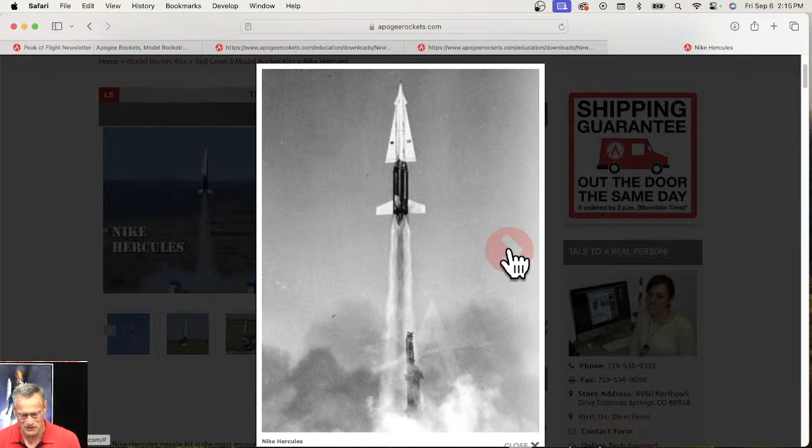And here's a picture of the real Nike Hercules. From what I hear, the real one reaches Mach 1 about when this photo was taken. It's already going so fast because it's got so much thrust coming out of it. And then here's some standard pictures that you see on the internet. So that's the Nike Hercules. I won't talk about it anymore because we're here to talk about RockSim.

Tara Wheelock is asking about what kind of glider we are going to be building. We're going to build the Mini Condor. So if you type in Mini Condor, this is the rocket we're going to build. It's a small rocket. It's powered by mini motors from Estes. Come on, open up. That's what it looks like. It's got

My mouse froze. My screen froze. There it goes. It came back.

Yeah, so it's got a glider pod on the top. And this is a beautiful flying glider, and it's an easy one to build, and so that's why we chose it. It's got a resin piece here. Everything's laser cut.

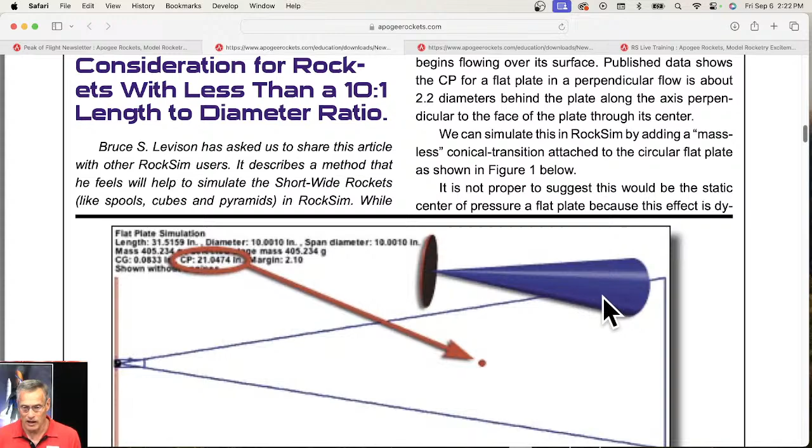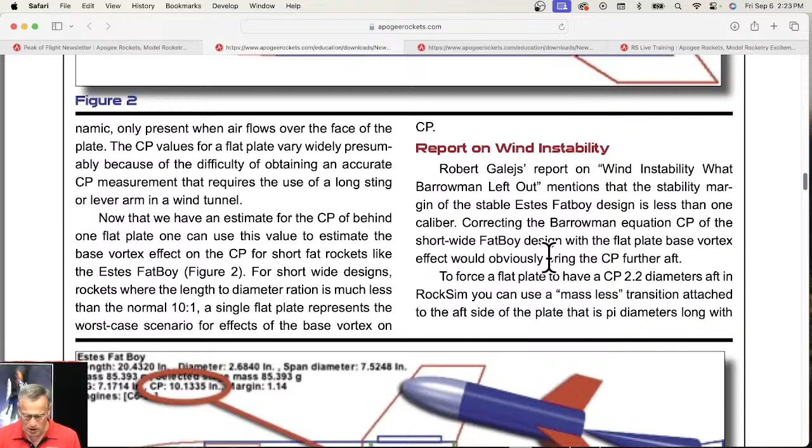So what he found he could do was simulate a spool rocket with a disc with a cone hanging off the back end. His formula was to make the cone pi, 3.14, times the diameter of the rocket. So that's the length of the cone, and the diameter of the back end of the cone is the same diameter as the rocket. You attach that to the rocket, and that's going to move your center of pressure back. It works for spool rockets, and he thinks it works well for short, stubby rockets.

At what point do you stop putting the cone on the back? I don't know. I wish I did. If we had wind tunnels or computational fluid dynamics, we could maybe do some experiments, but we don't. So you could build some rockets, and the problem is the motor for this is in the normal spot, so it's going to burn that cone off.

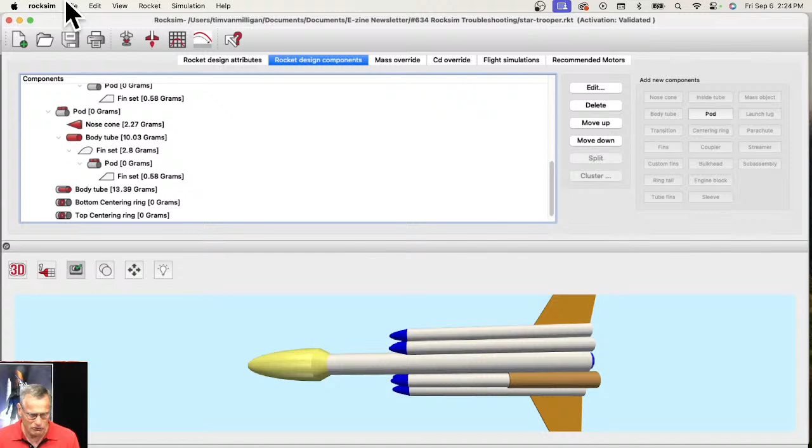So let me open up RockSim here, and let me open up the Fat Boy. Oh, he sent me a rocket. Did I save it? Shoot, I don't think I saved it. So I'll open up. It was the Doorknob. So let me see if I can find the Doorknob.

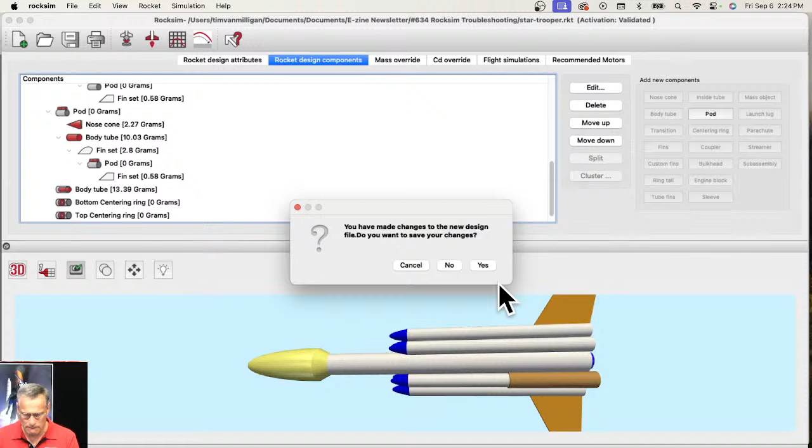Doorknob. Doorknob, I'm looking for it. Yeah, there we go. So we have an Estes Doorknob. Okay, so here is the Estes Doorknob. It's a relatively short rocket, so it's got a diameter of 3, a length of 27. So 27 divided by 3 is 9. So it's got a length to diameter ratio of 9. So this does violate the Barrowman equations.

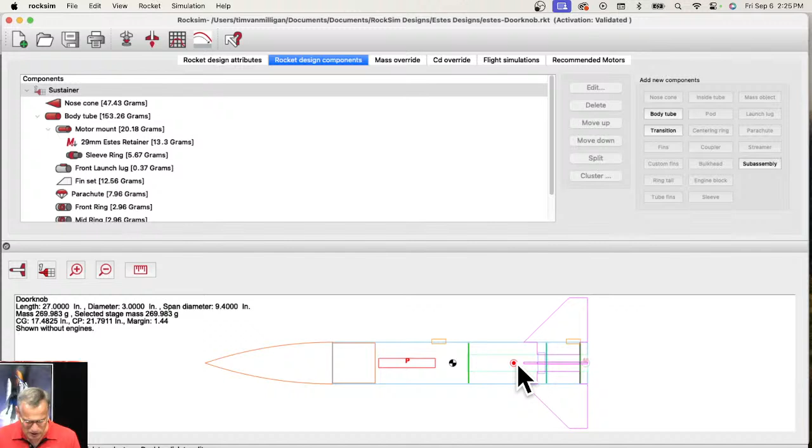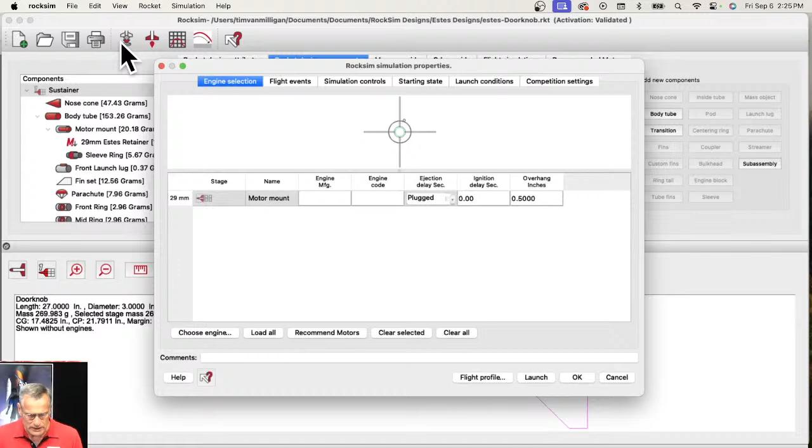So right now our center of pressure is at 21 inches, which you can see right here, from the tip of the nose cone. So that's this little symbol right there. And let's put a motor in this rocket so we can see what's going on when we put a motor. And this is a motor mount of 29 millimeters. And I don't want to show all engines, I want to show only those that match the motor diameter.

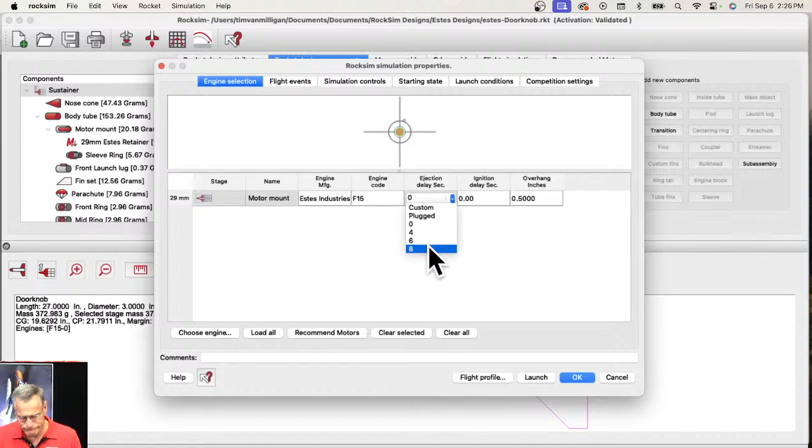Let's try an Estes F15. And let's give it a delay of 8, I don't know, and say OK. Okay, so now by putting the motor in there, what happened was the center of gravity, which used to be up here, shifted back because now the back end's heavier. So our margin is 0.72.

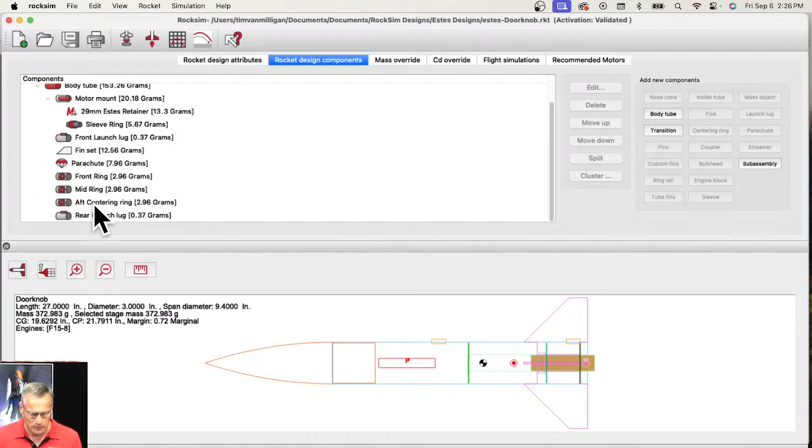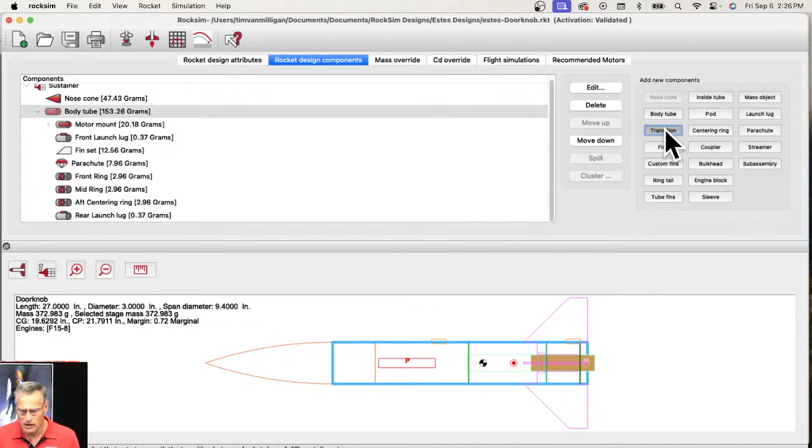All right, so now how do we add that cone on the back? So I'm going to close all these. Okay, so I'm going to add the cone to this body tube right here. And if I go over here, there's nothing that says cone, but we do have one that says transition, and that's what we're going to use. So I'm going to click on that, and it's going to open up the database, and we're not going to go from the database, so I'm going to cancel out of the database. And this is the editor screen for the cone. And right now I'm looking at the rear view of the rocket.

So if you come over here to the side, and we'll select the side view, and so now we can see it. And our cone is not showing because everything is 0 right now. So the front diameter, we want to make it as pointy as possible. So I'm going to make it tiny, so 0.01 inches. And then my rear diameter, remember the rear diameter is the same diameter as the body of the rocket. So that's going to be 3 inches.

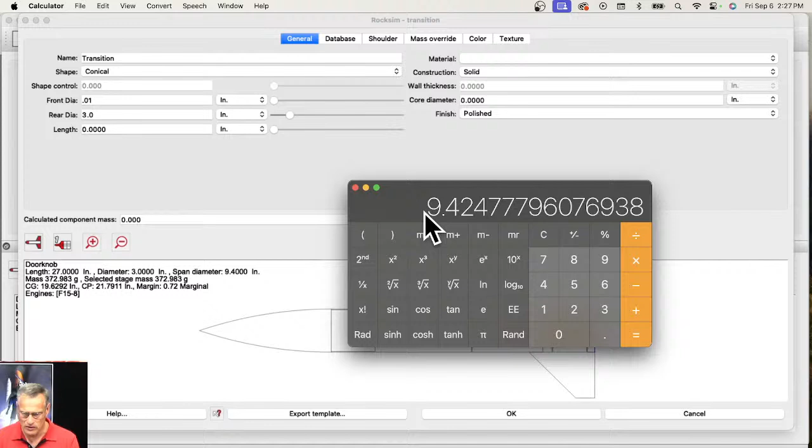And then the length is pi times the diameter of the rocket. So let me get a calculator here. So we got a diameter of 3 inches. So pi times 3 inches is 9.42 inches long. Okay, so our length is 9.42 inches long. So now we have a cone on the back.

One of the other things that Bruce said in his article was it has to be massless. It can't have any mass. And the reason is that's going to shift the center of gravity back on us. So we need to make this like paper thin. So I'm going to make it paper thin, and it's going to be hollow. And you can see right now our mass is 0 grams for that component. And if I look at it in 3D, you can see my cone sticking out the back of the rocket.

So now the purpose of this was to change the center of pressure. And before, our center of pressure was at 21 inches, so it was a little bit further forward. By putting this cone on the back, it shifted it back, and now our margin is 1.18. Before it was 0.7 something. So that's what it did to move the margin back. It didn't add any mass to the rocket, so theoretically it should still fly as high as it did before.

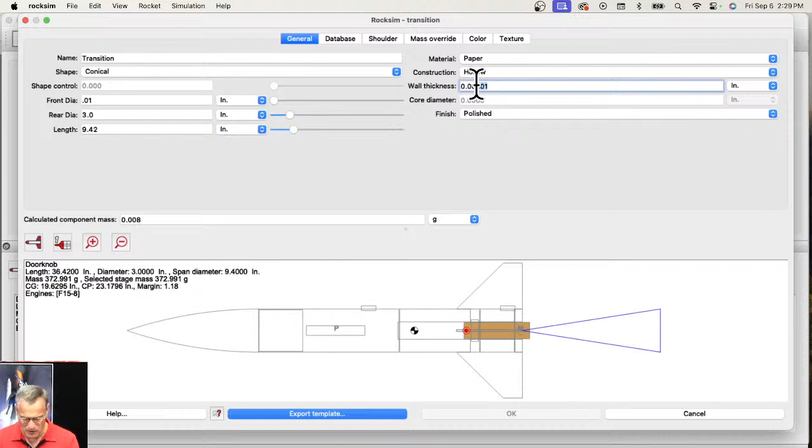We'll say okay here. And the thickness must be greater than 0. Okay, so we got to add some thickness here. So I'm going to make it 0, that much. And oh, what happened? My button is not working. Oops. It's asking me to save it. I don't want to save it. Is there something else open behind me?

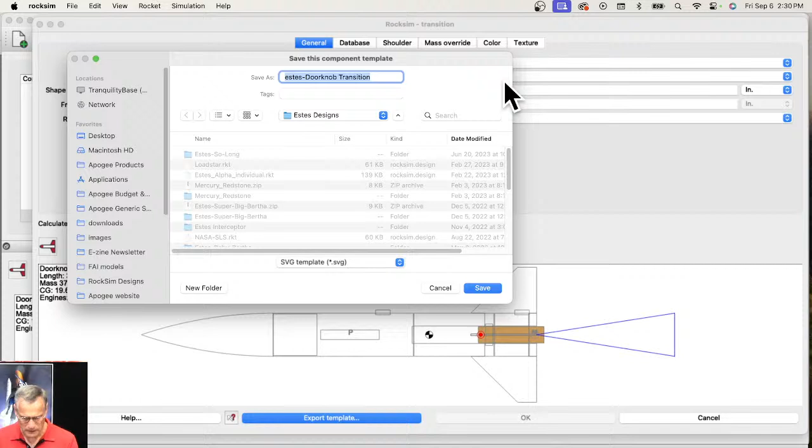Export template. This has happened to me before. It's asking me to save this component. It's kind of like it's looking in the database. My button stopped working. What's going on? Let's click here. Oh, save your changes? Yes. Okay, well, I got around that. So my cone is on here.

We can run a simulation. Okay, we already got the Estes F15-8 in there. We're going to deploy the parachute at maximum ejection, launch conditions. We're launching from an altitude of 700 feet, and we have a 5-mile-an-hour wind. And let's see the flight profile.

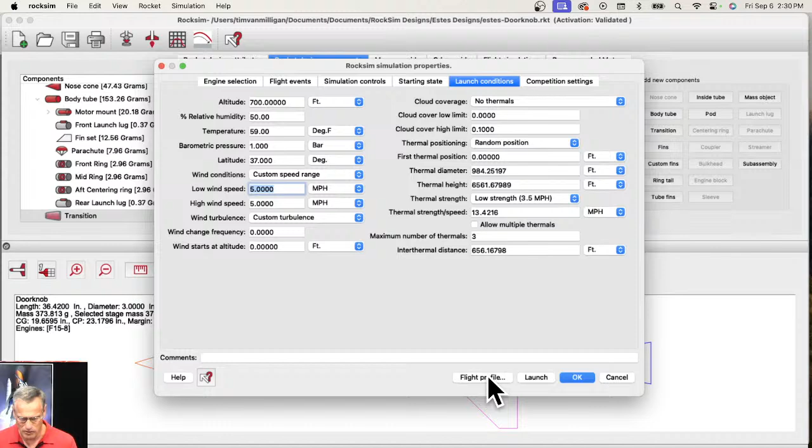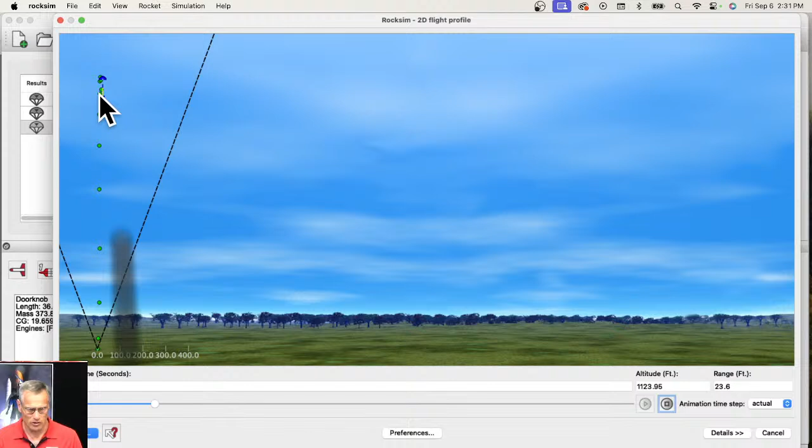Because this is a little bit more stable, we'll see what it looks like. And it's taking off. It's going really straight, actually. So that's pretty good, I'm okay with that. And there's the parachute, right on cue.

I don't know if this will answer your question about cones, because there's a lot of questions I have. Do I use them on my own rockets? I don't. But Bruce liked them, and he swore they worked. It lets you design rockets on that hairy edge of stability, and if they're under that 10-to-1 ratio, they might be stable because of the extra drag. RockSim doesn't calculate that extra drag, and if we knew that base drag better, maybe we could, but I don't know.

So it's going to take some experimenting from the modeler if you want to use this technique. I wish I could endorse it fully, but if you don't have that cone on there to make it stable, this rocket had a margin of stability of 0.7 prior to adding the cone. I would still be okay flying it with that margin of stability. But if you're not okay with it, you have to put nose weight up front to move the center of gravity forward, so that the margin, which is the distance these are apart divided by the diameter, is as close to or greater than 1 as possible. So let me know, Mark, if that answered your question.

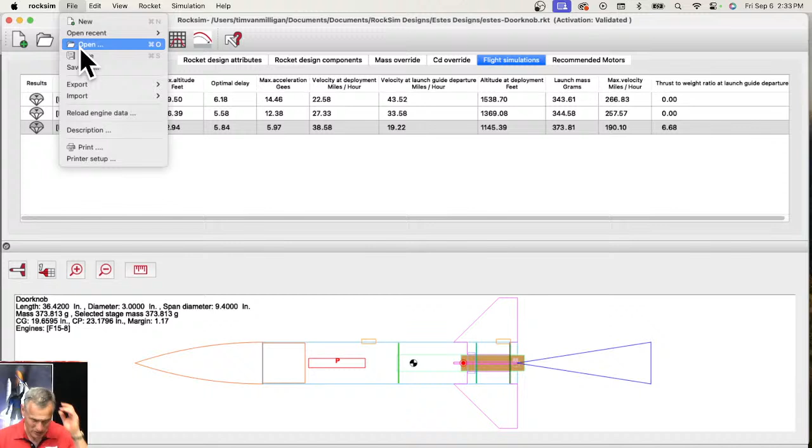Okay, so we need a rocket with a subassembly. I was just looking at one the other day. The Semroc Mars Snooper. You can see what it looks like, and I can tell it's got pods on it because the only way to put that there is to have a pod on it. So you go to the rocket design components.

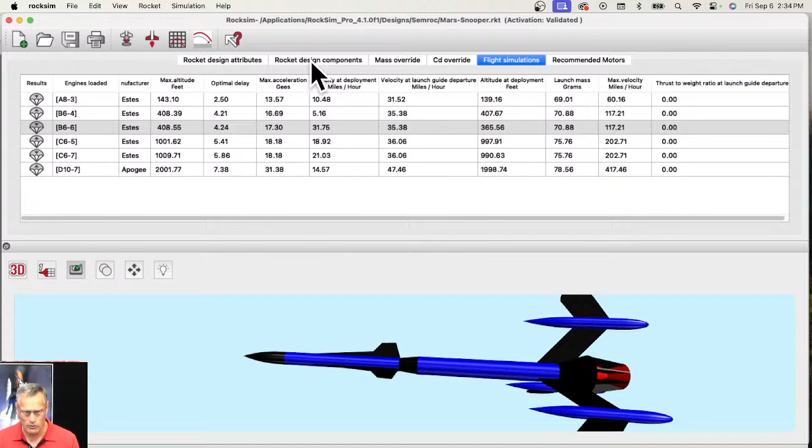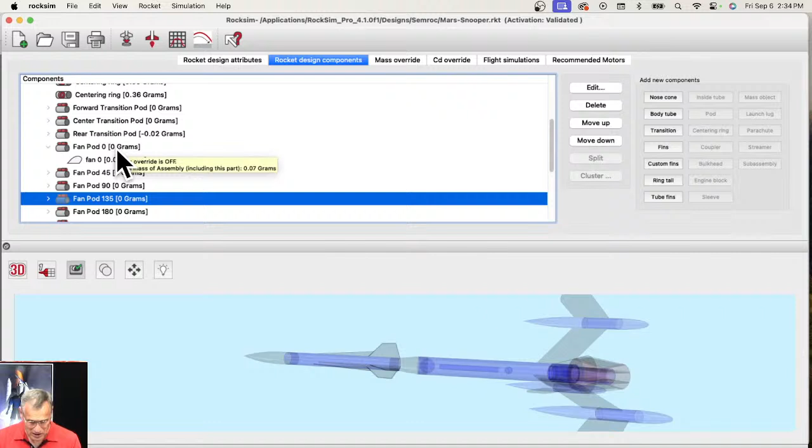And if we go down to the pods, I swore it added. So you can see right here, it's not telling me the weight of that pod, and I swore that it did. Maybe it's because this rocket is brand new, or it was made old.

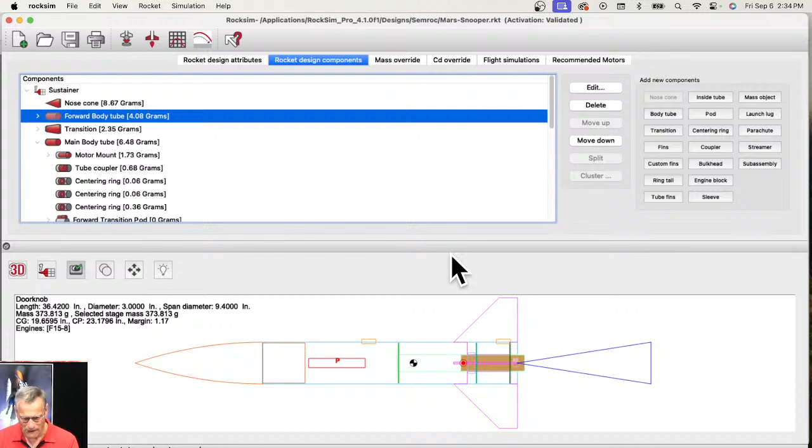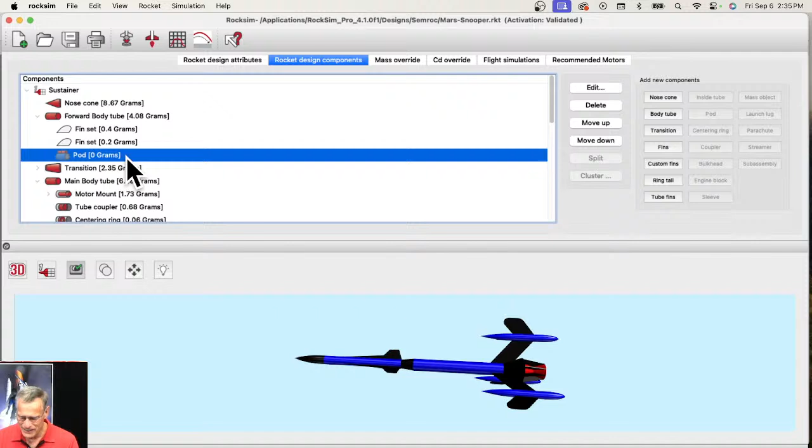Let's try it. Let's go to this forward tube and add a pod. We'll just throw one on there real quick and see what happens. Holy cow, okay, so that's where the location of the pod is. And we'll say okay. Now it's running a little slow, I got a lot. When I'm running my Mac it runs slow, I need a new Mac. So let's add a nose cone to that pod.

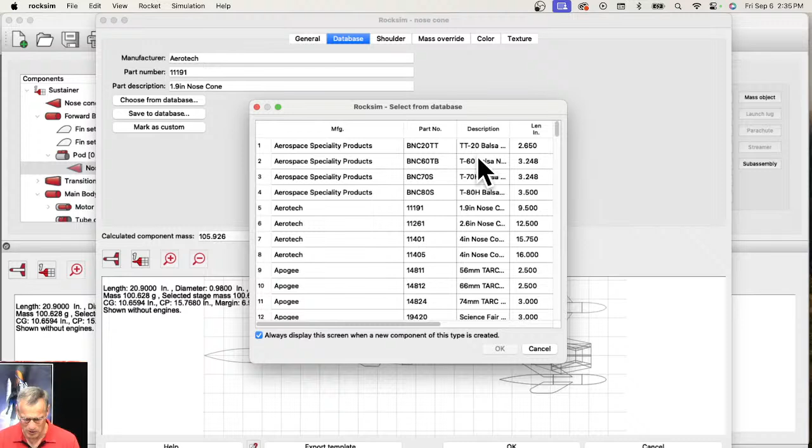It doesn't matter what nose cone I use, just add one. Oh, that's a big nose cone. Let's go choose the database again, let's make something a little bit smaller. PNC 24 - okay, well, yeah, it's still pretty big, but I'll add that. So that is added to the pod.

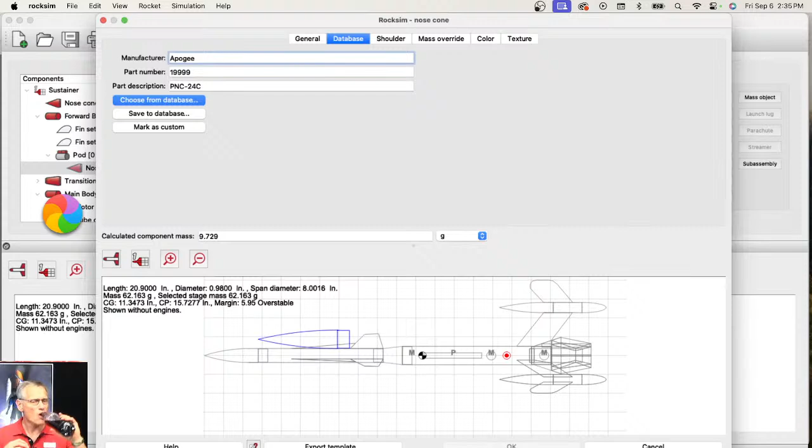If I come back to this screen here, let's see what happens. It still didn't add, it still didn't add the weight. So I guess that answers my question - it doesn't add. It should, I thought it did.

Maybe there's a preference I'm missing. I'm looking at my preferences here - show masses in the component tree. Let's turn that off, and it shouldn't be showing the masses right now. Okay, so now it took away the mass. I'm going to turn that back on. Preferences, under units, show the masses in component tree. Now this is only in version 11, so it's not in older versions - this is a new feature.

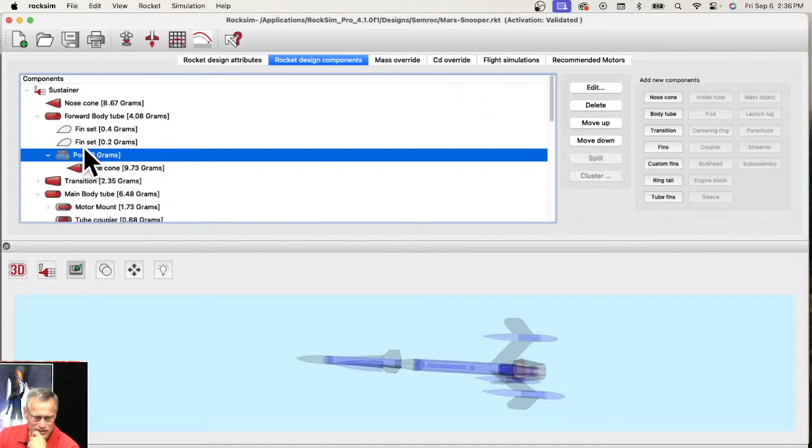So turn it back on, it's thinking. Still not showing - I swear it showed before. I'll have to talk to the programmer about it, but we have our answer.

But what you can do is - let's see if I can find another pod. So here's a pod right here, but it only has one part. But if the pod has multiple parts, all the component masses are going to be listed right below it, so you can just take out your calculator and add them up really quick. So that should work.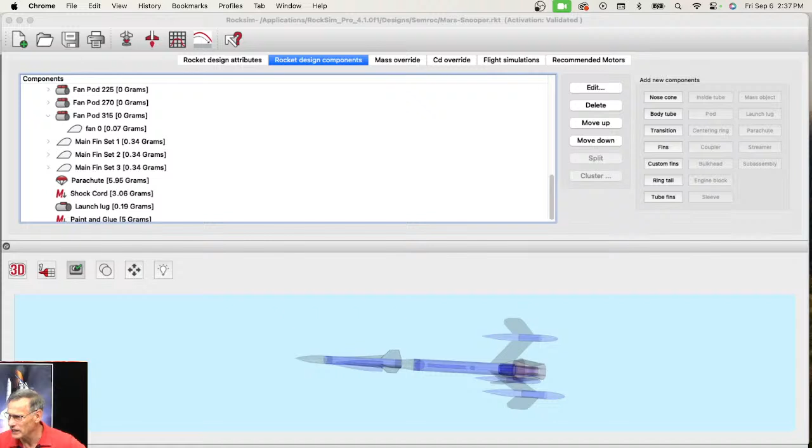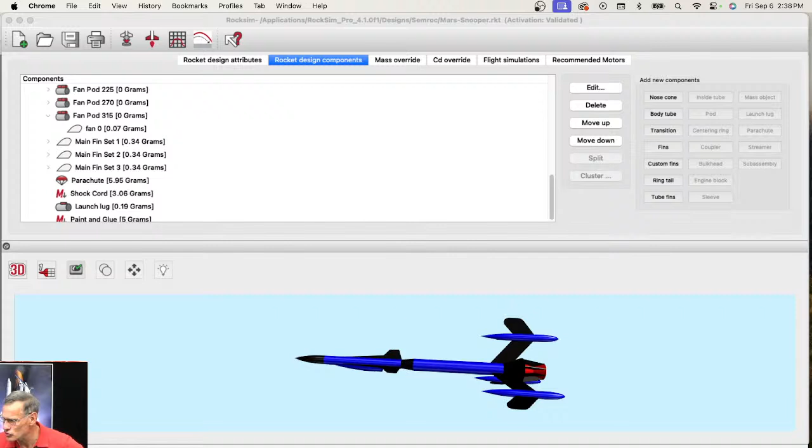Okay, so David Hayes asks another question: also, not sure RockSim 10 is updating the engine info properly - dates on engine files in the data folder do not change. Also, many of the engines come through with a question mark for the diameter when I try to load them in a sim. Okay, so RockSim 10 doesn't auto-update the motors like RockSim 11. But he's saying: I have dates on engine files, the data folder do not change. Also, many of the engines come through with a question mark for the diameter when I load them in a sim.

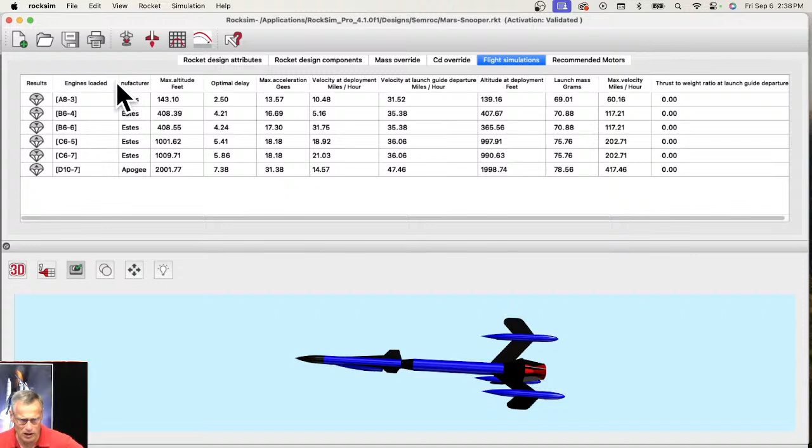Sometimes if you go to the flight simulations tab and add a new column called engine diameter, right now it's not showing. So if you right click on the column header and choose organize columns, you can select engine diameter, then click OK, and it adds the new column.

And right here you'll see there's a question mark. I think this is what he's talking about. Let me take that column and move it over here so we can see it. Okay, so here's the engine diameter. So a D10-7 from Apogee, it says I don't know what diameter it is.

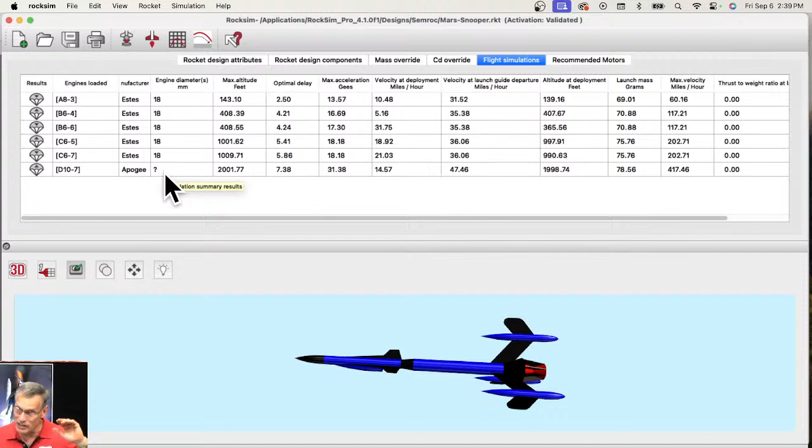The reason is, in this simulation summary screen, which is what you're seeing right here, these are old simulations. So this is telling me these were probably run prior to version 11, so in version 9 or 10, and then the file has been opened in version 11. Version 11 saves the diameter, version 10 and 9 did not, so the simulation summary screen won't show it. But if I run a new simulation, it should pick up the diameter.

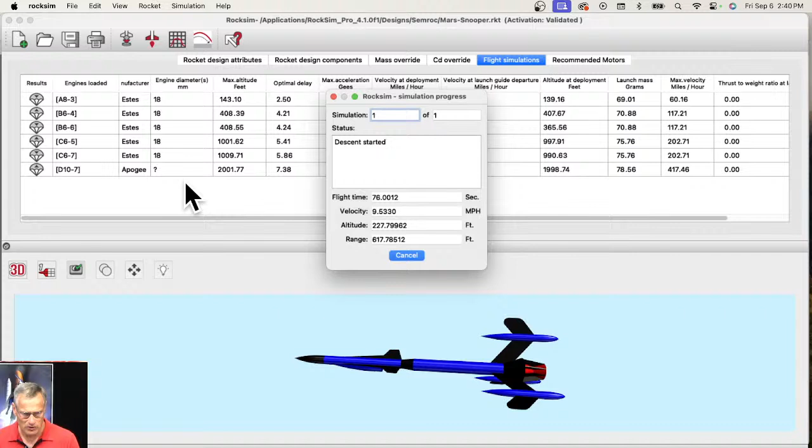So if I use a Quest C18W-8, click OK, and launch it, and it runs the simulation, I'm expecting to see a diameter right here, because now under new flights, it's loading the diameter.

But if you're seeing them in the engine database, choose engine, you should see them here. If you're seeing a question mark here in this screen under engine selections, I've never seen that before, so I couldn't tell you why you're seeing that.

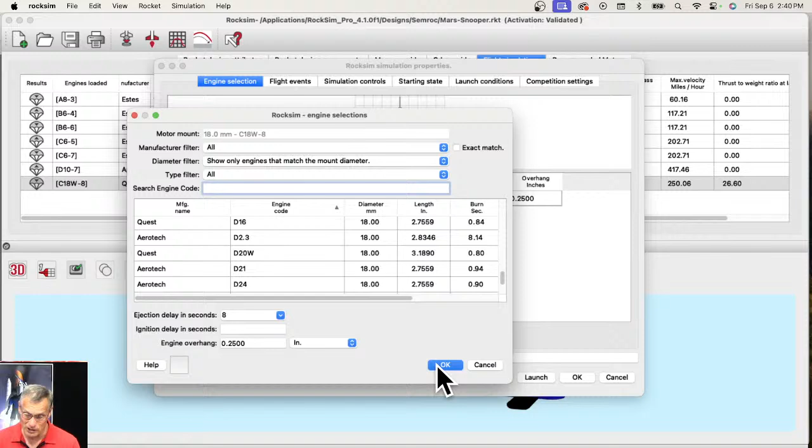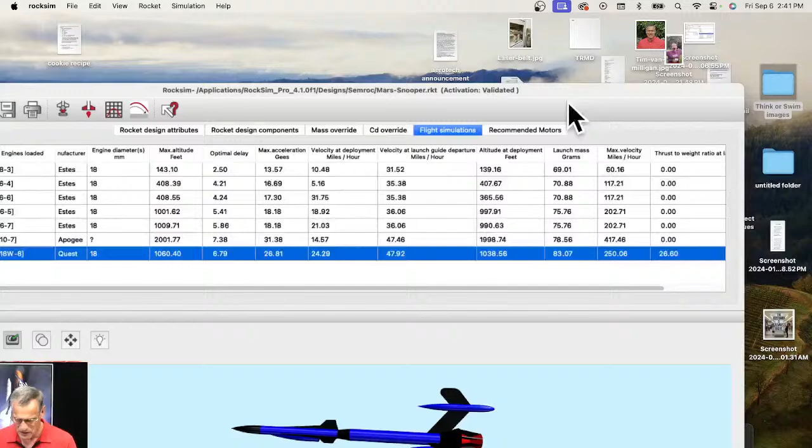As far as engine dates and the engine files, those original files are stored - let's quit that. If you go to your Finder and go to the Go menu and hit the Option key, I can load my library because they're kind of stored in a weird place.

So it's under application support. Why is this not in alphabetical order? Let's change it to this way. And then under Apogee components, I'm running version 11, and then they're under the data folder. So now I'm in the data folder, I hope. Okay, yeah, I opened up the data folder.

Here are the dates, I'm not sure if these are the dates they were added to the RockSim database. All of these show 2024, so I'm thinking that's the date they were added to the RockSim database into this folder, downloaded from thrustcurve.org. But I don't know what the question is - it says they're not in the file, but they are in ThrustCurve and available on Aerotech's website.

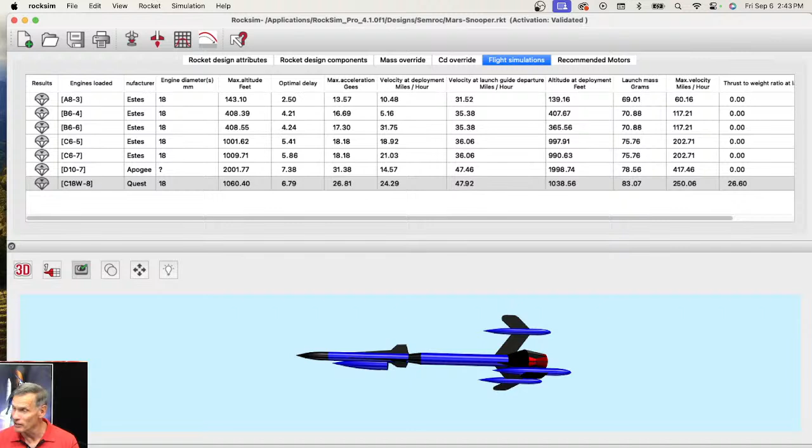I mean, OpenRocket - oops, where'd it go - this one right here, I am pretty sure that OpenRocket can't make a rocket that looks like this. RockSim can do some spectacular things, and I'm still learning, and I've been developing the program.

TURDA4U says, I'll take one when available. I think he's talking about the Nike Hercules.

Starco 3 asks if my picture is frozen, and maybe it froze on my computer for a second there, so hopefully it's not freezing for you too much longer.

Alan White is here, and he says hi Tim. Alan White from Seabrook, Texas, checking in. It was a pleasure to finally meet you at Airfest last weekend. Looking forward to that new Nike Hercules. Thank you.

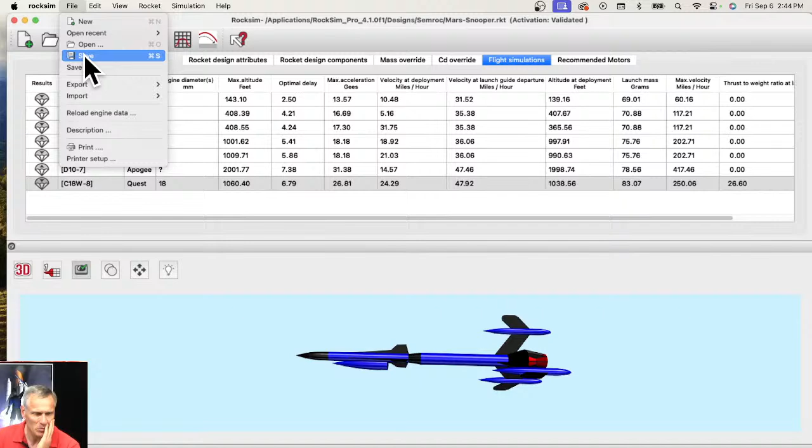Mark Sell says, do you have a RockSim file for a spool rocket? And I don't know - oops, I don't want to save, I hit the wrong button. File open, go to my search bar and type in spool, see if anything comes up. That looks like a RKT file, there's a picture of one. I do not have a spool rocket file, sorry, I don't.

David Hayes says, try simulating the doorknob without the cone. Well, I already lost it.

Low Budget Bob says hi from Buckeye, Arizona.

Terry Wheelock says, do you need a cone for a cone rocket? And the answer is maybe, I don't know.

Ron's Rocket says, add a pod to the Nike Hercules. Why would I want to add a pod to the Nike Hercules? Okay, I got an example.

Nike Hercules. Okay, Nike Hercules rocket. I should have a new one, because Martin made me one. Let's try this one. Did my changes? No.

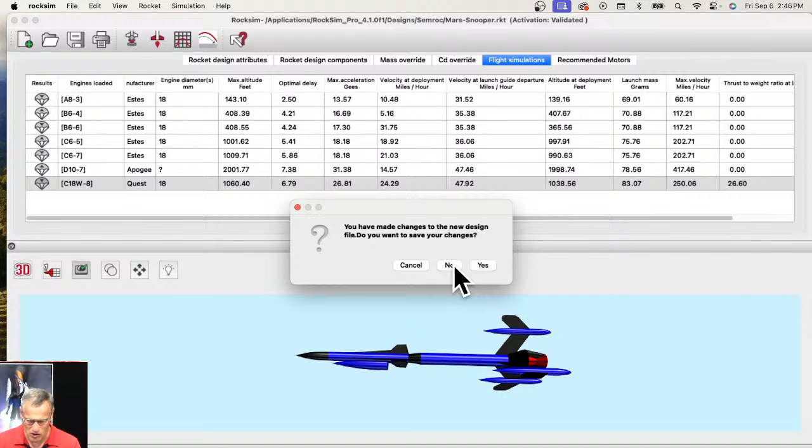So one of the reasons you might want to add a spool or a pod is maybe you want to put a camera on the outside of the rocket. So that would be a use for a pod on the Nike Hercules. See this transition here in the middle?

RockSim doesn't like shapes like that. It needs things to be circular like this. So we had to cheat on the back end of the rocket right here to make a Nike Hercules so that we could actually fly one.

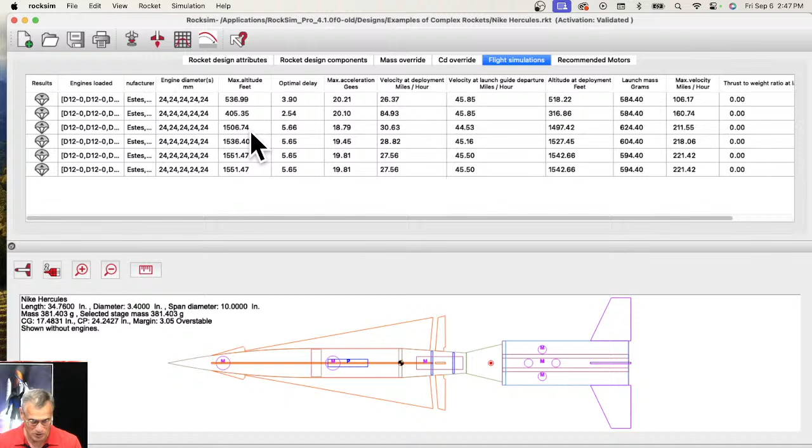But to add a camera, you find a body tube. So I can say I'm going to put my camera on this tube. And then you'll select a pod. Right now I put the pod right there.

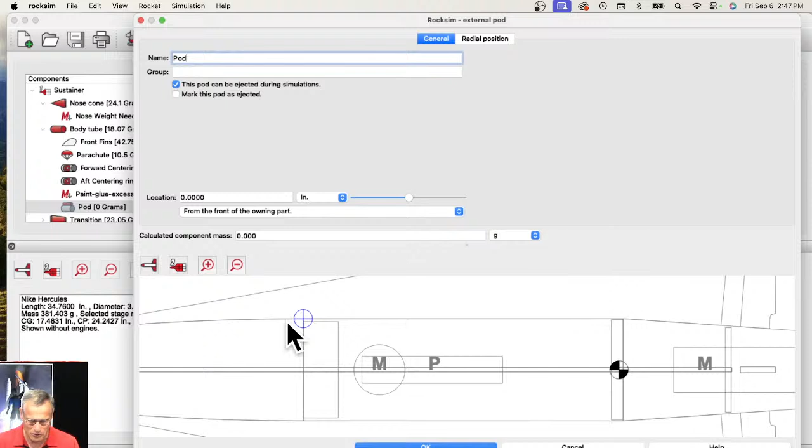The pod is a collection of parts, so it doesn't look like anything right now except for just this symbol. So we're going to call it a camera pod. Click OK, and then we can start adding parts.

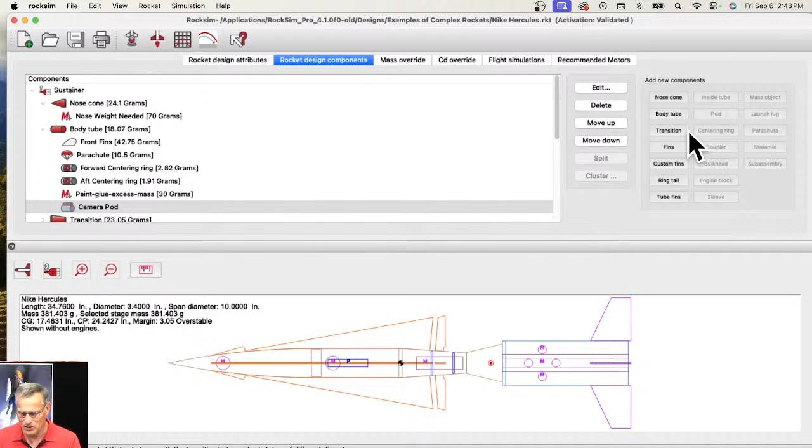So what does a camera look like? Well, again, we don't have too many parts we can use. We can use a nose cone, a body tube, or a transition. I'm going to try a transition just to say what the heck. It always looks in the database when you're starting a new part, so I'm going to cancel out of that.

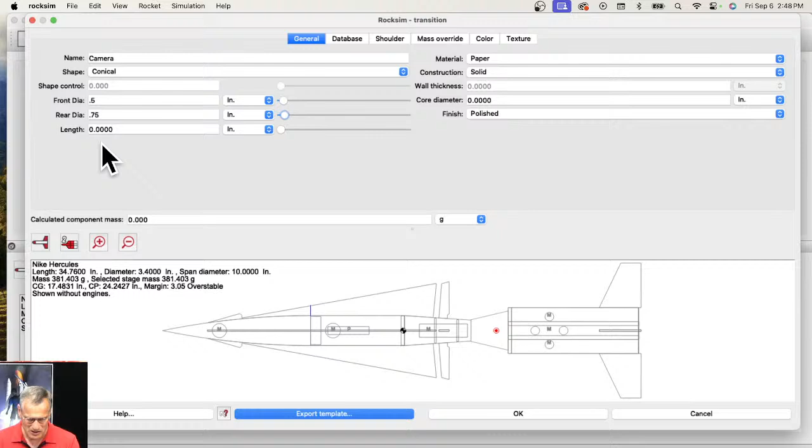And we're going to call this the camera, and give it a front diameter of about a 1/2 inch, and a rear diameter that's like 0.75 inches, and a length of 2 inches. So it attached our camera right here. It's made out of solid, so it's going to weigh 11 grams, and I can live with that.

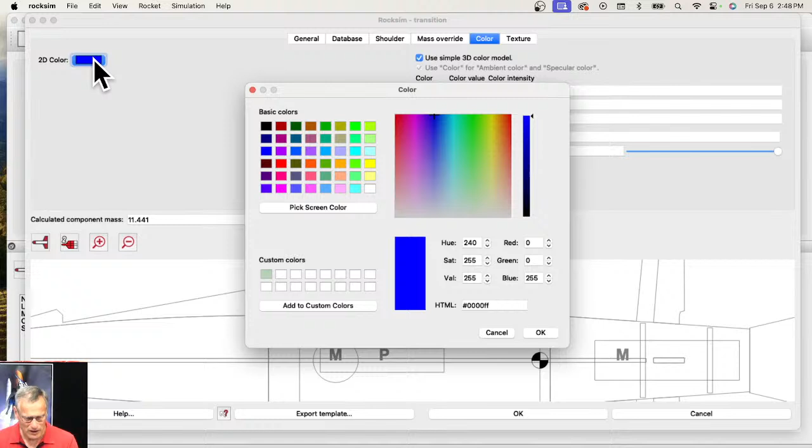Let's change the color to red, and the 2D color to red. Click OK, click OK. And so at this point we've added a pod to the Nike Hercules.

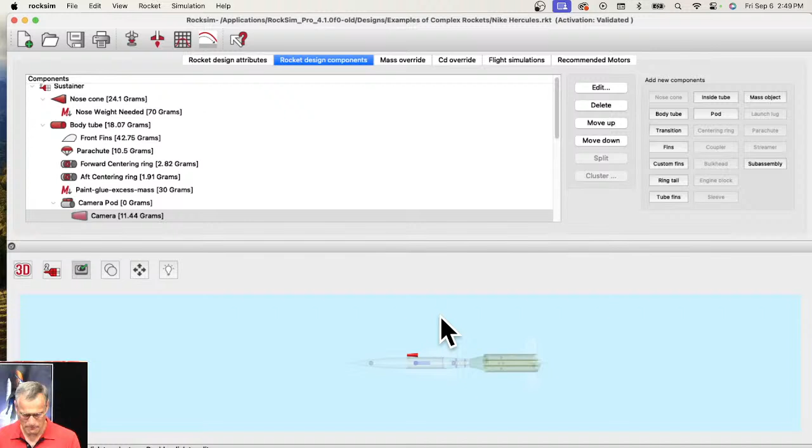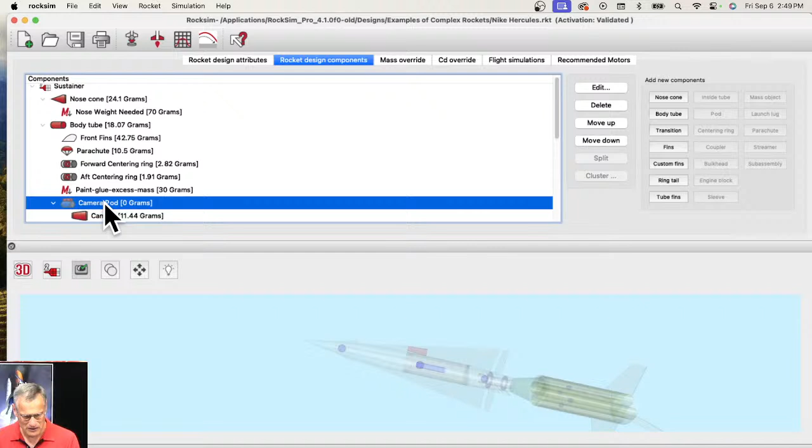I'm waiting for it to refresh. Oh, I put it right in the middle of the fin, so I would have to move that pod around. Let's go back to the camera pod. It should open up here in a second. It's thinking.

Ron's Rockets is here, and he says that's awesome. Alfred Indy says he met David Hayes. David, you are a celebrity. At Tripoli Michigan 2 weeks ago, it was nice meeting someone from the RockSim forum.

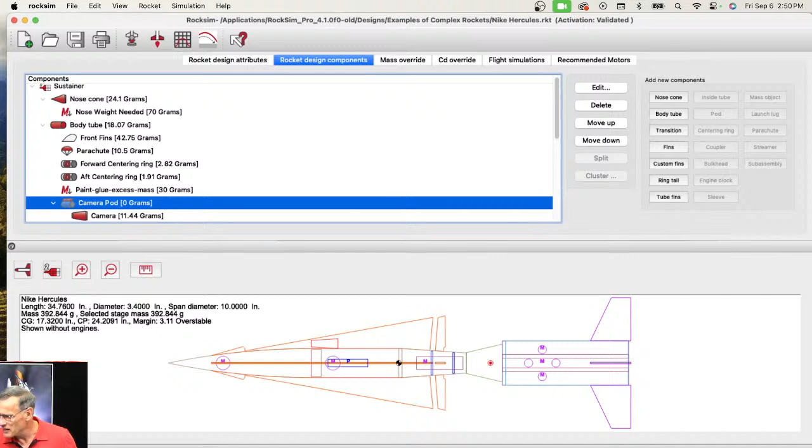Ron's Rockets says what is going on here? It should have opened this up. It kind of froze my RockSim. It just doesn't like when I'm doing too many things at once. I'm probably going to have to quit RockSim just to get out of it. It won't let me click on anything else.

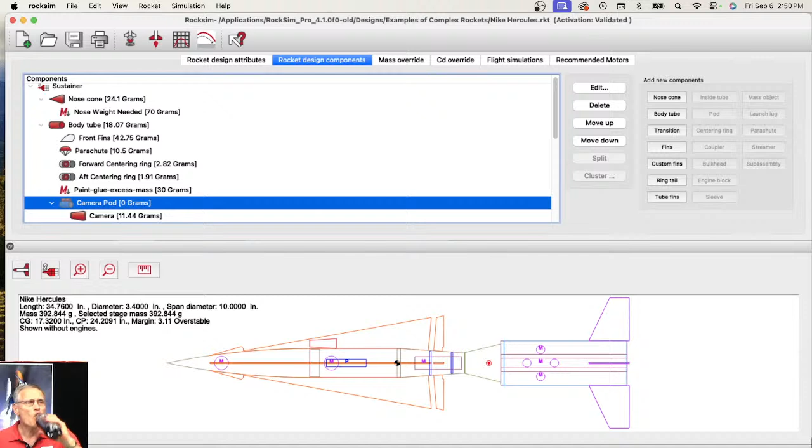Starko3 says, where is the autosave switch on RockSim? There is no auto switch for saving. I wish there was. I wish it was like Google. But sometimes you don't want it to autosave.

Ron's Rockets says we have a 100K foot rocket to launch on Friday the 13th. Wow, that's going to be spectacular.

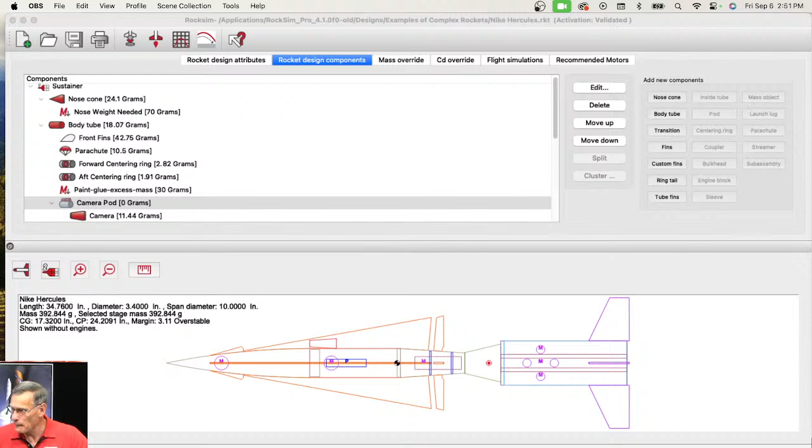My RockSim is froze up, so let's see if I can quit. No, it does not want to let me quit, so I'm going to have to force quit. All right, so I forced quit. I got RockSim Pro in the background.

Alfred Indy says my only mistake was not getting my motor order into Apogee in time and could not launch the Kronos. Lesson learned. Yeah, you got to order those motors early.

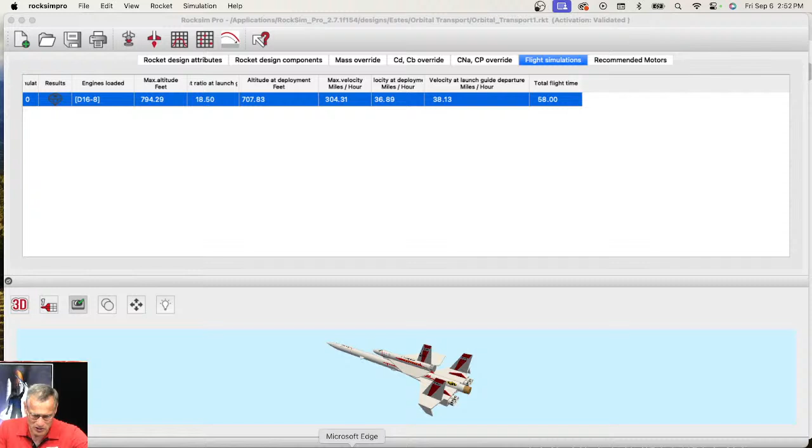Right now we are slim pickings as far as rocket motors go from Aerotech and Cesaroni. Aerotech is behind, everything's okay with the company as far as we know. I talked to them at NARAM in early August, and they say they've just been swamped. There's a lot going on besides hobby rocketry - university projects, commercial projects, military projects that Aerotech and RCS, the parent company, are working on, and it's sucking up all their time. Not the resources, just the time. So they don't have time to make motors.

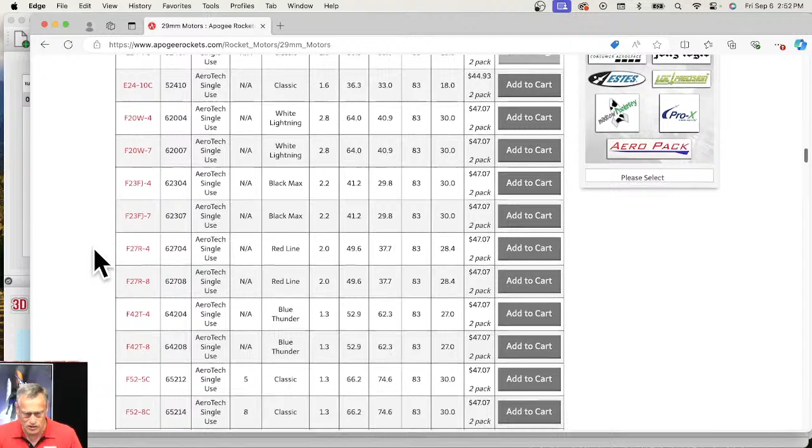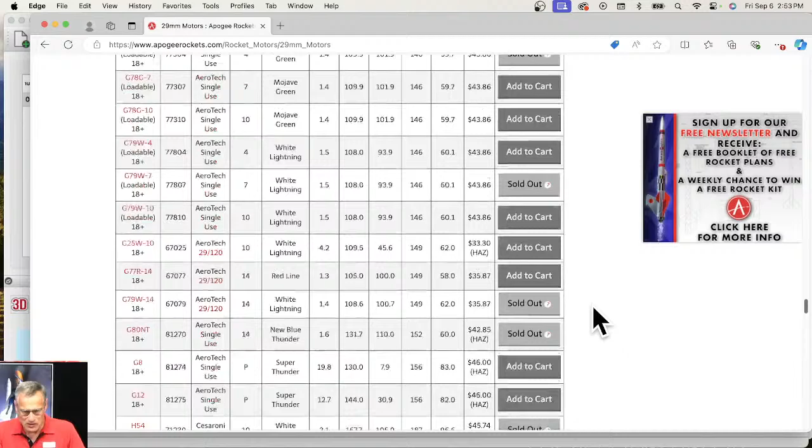If I go to rocket motors and 29 millimeter motors, and scroll down to the chart, we do have some, but there's a lot that are sold out. Sold out, sold out, sold out, especially when you get into the bigger ones, the G's - the big G's sold out. Look at all that, this is killing me here. We do have an H135. And the 38 millimeter motors are the same way.

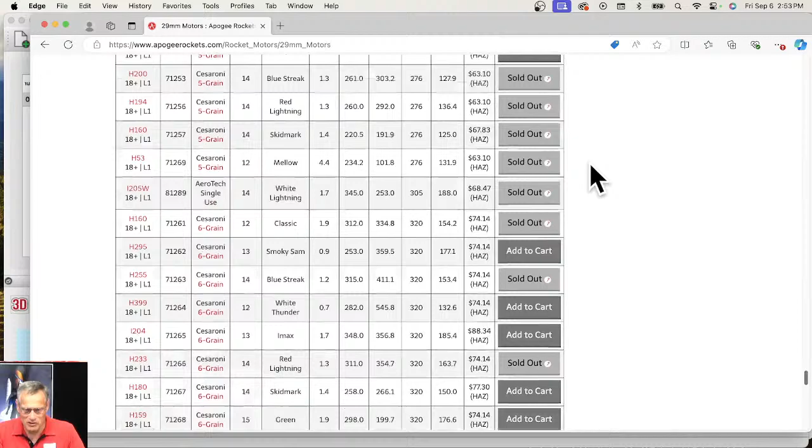It's just like we're sold out of everything. So if you need to make a motor order and you see that the motor is in stock, you better snatch it up, that's all I can say. AeroTech is telling us because they're so behind, it might be 6 months between orders. We order every month, so we're on a 6-month lag - every month we get a little bit.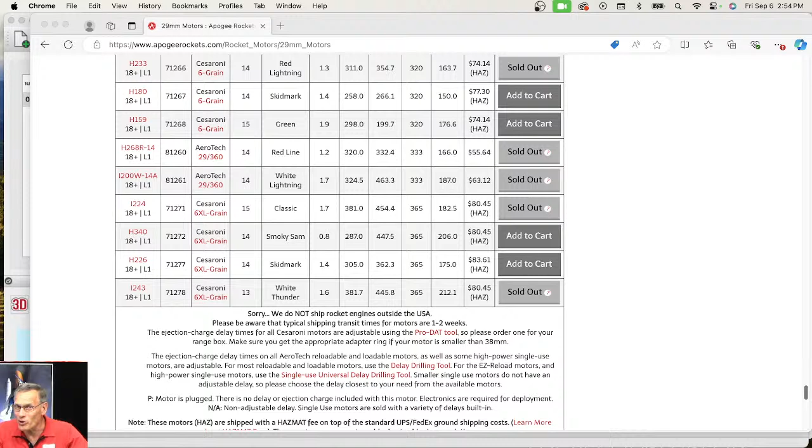Yeah. So order them when you see them. You know, on the sold out items, if you go to the item page, like this is the I-243, you can come here to the back in stock notification button. You click on that, and it will take you here where you can enter your name and email address, and you have to enter the CAPTCHA just to prove you're a human, and it will put you on our automated notification list. So as soon as we receive them, our website automatically that same day will send out an email saying, hey, we have the motor in stock, or any item.

We're also doing the same thing for the Nike Hercules. So if you want to be on the notification list for the Nike Hercules, go to that Nike Hercules page, click on the back in stock notification, and then as soon as we release them, you'll get a notification. There's already a big list of people, which I appreciate, because we need to sell a lot of them to pay back all the investment I made in the tooling.

Troy Airmet says the H35 is a great 29 millimeter motor. So you have an endorsement from Troy there. Get it while you can get it.

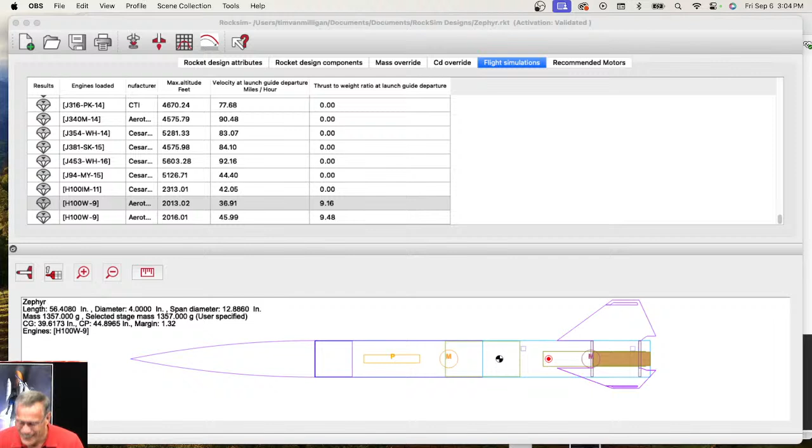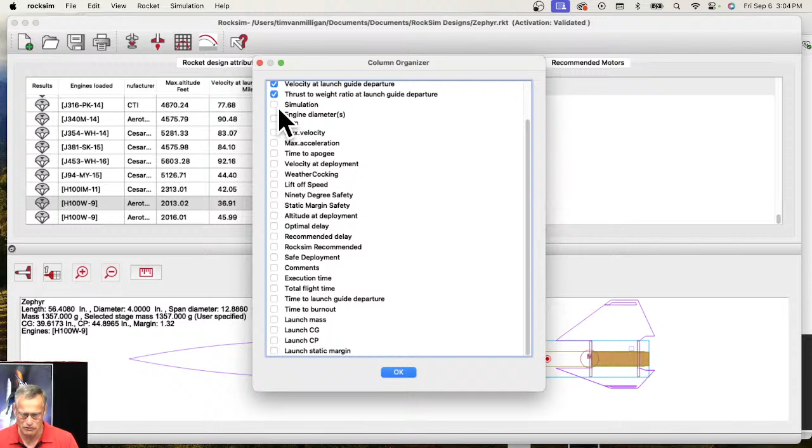So I ran my simulation with the Zephyr, and you can see the first time I launched it, I got 2,013 feet and a velocity at launch guide departure of 36. And to show this column, like we did before, right-click on the column header, organize columns, and then you can select which ones you want to display in the flight summary right there.

So I had turned on velocity at launch guide departure and the thrust to weight ratio at launch guide departure. And so here's the first one, and here's the second one. So 36 on the first one, 45 on the second one. And the only difference was this one had the 6-foot launch rod, and this one had the 8-foot long.

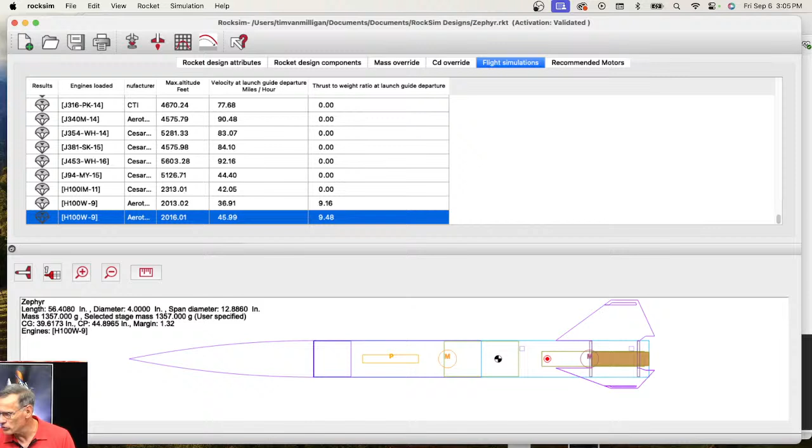Turda for you says, thank you, Tim. I was testing my 5.5-inch Goblin on a Cesaroni I-100RL, but did not realize the rail was set at 36 inches. Now that I've changed it to 96, the rocket stays in safe cone. Good.

Ron's Rocket says, let us know when you're heading to Oahu anytime. Woo-hoo. All right, I will. My wife has been wanting to go.

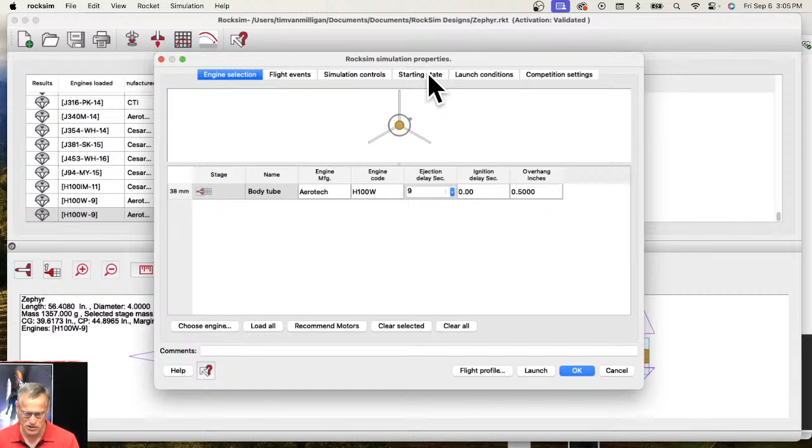Okay, so we're after 3 o'clock. So that launch guide length, just to show you, is under the starting state tab when you are loading engines. So the engine selection was this one, then you go over here to starting state, and that's where you change the launch guide length. Okay.